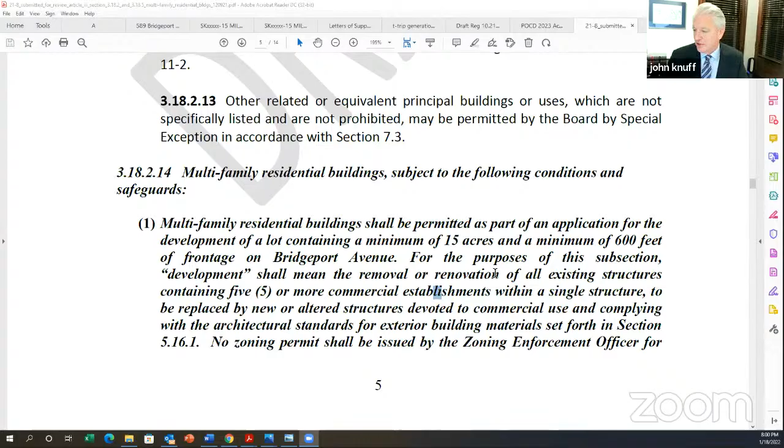Next sentence. And here's the connection. No zoning permit shall be issued by the zoning enforcement officer for multifamily residential buildings approved under this section unless or until a zoning permit for any portion of the commercial development has also been issued. So the idea here is that you can't simply come forward with a special permit application for the multifamily and maybe a special permit application for the commercial as well, and then build the multifamily and walk away from your commercial obligations. You have to do both.

Such multifamily buildings shall be limited to efficiency, 1-bedroom and 2-bedroom dwelling units. This is consistent with many of the other corridor design district regulations, including CDD1 and CDD2. The maximum number of dwelling units shall not exceed 17 units per acre. This is actually far less dense than the requirements in the CDD1, CDD2, as well as other zones. The maximum building area coverage shall be 25%. This is for the residential portion. In the CDD3 it is currently 50%, so less dense than what is otherwise permitted.

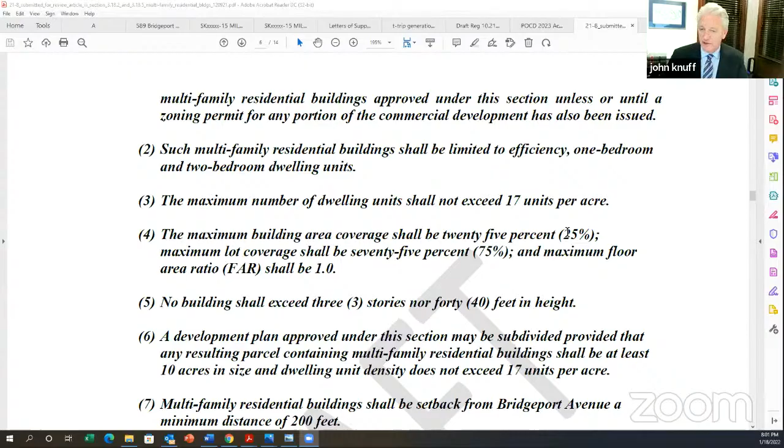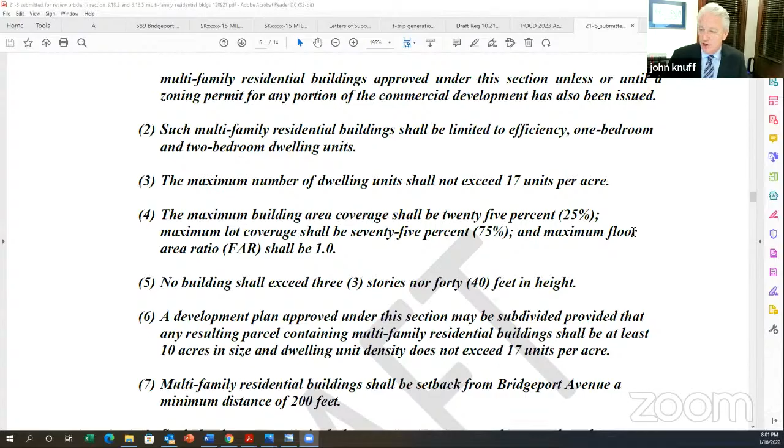Maximum lot coverage shall be 75%, and maximum floor area ratio shall be 1.0. Those are consistent with your existing regulations. No building shall exceed 3 stories nor 40 feet in height. That is consistent with the CDD3 zone, as well as other corridor design district regulations regarding multifamily developments.

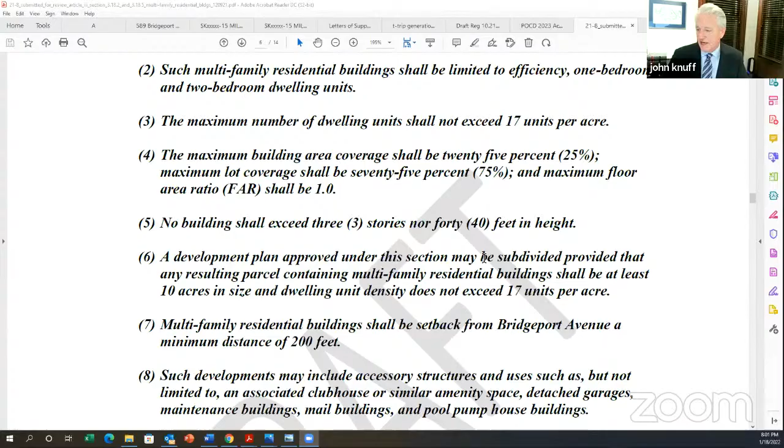A development plan approved under this section may be subdivided, provided that any resulting parcel containing multifamily residential buildings shall be at least 10 acres in size, and the dwelling unit density does not exceed 17 units per acre. So same thing, it just creates the opportunity for sale of the residential portion of a larger commercial development that has gone through the significant enhancement as required by this regulation.

Now, number 7, this one's important. Multifamily residential buildings shall be set back from Bridgeport Avenue a minimum of 200 feet. When we get to the concept site plan, you'll see how this actually plays out. But what it does, it addresses particularly the challenged sites, or in this case, the site that is rather deep along Bridgeport Avenue. I think if you scroll through Google Maps or the city's GIS system, you'll see that there are very few, if any, properties along Bridgeport Avenue, either in the CDD3 or the CDD2 zone, that have the depth that this site has. And that depth creates real issues with regard to creating commercial developments.

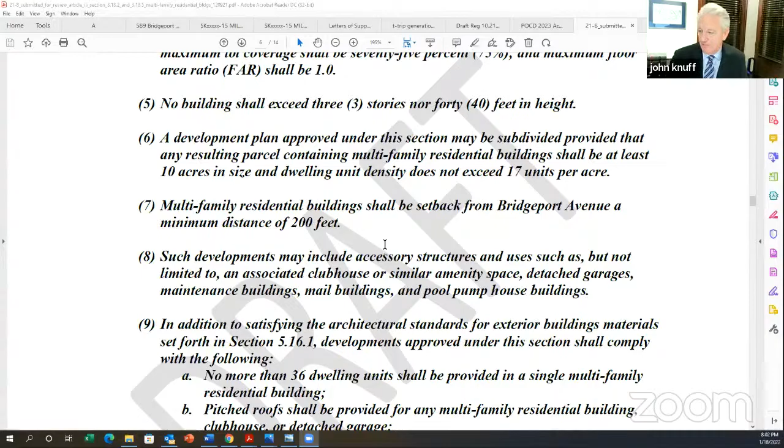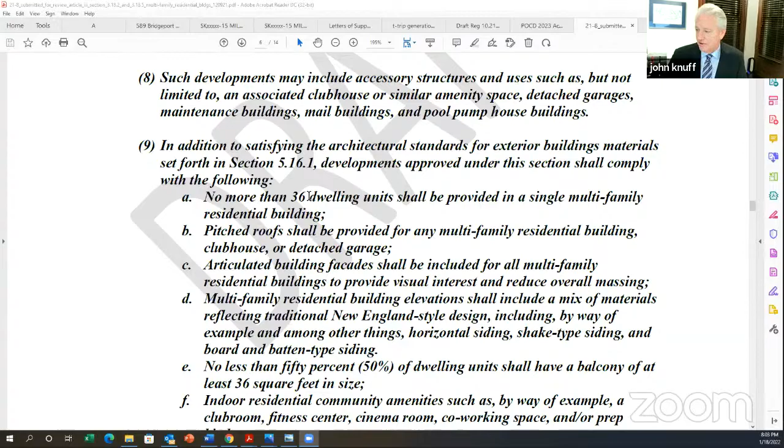Such developments may include accessory structures. Obviously, you want to create amenity space for the residents. And then with regard to the last, what we want to do in this section, number 9, is to create a really attractive development, residential developments of the proper scale that will appeal to a variety of residents. And when I say variety of residents, we're talking about singles, divorcees, empty nesters, young couples, snowbirds, the typical families in transition that would likely be inhabiting most multifamily developments.

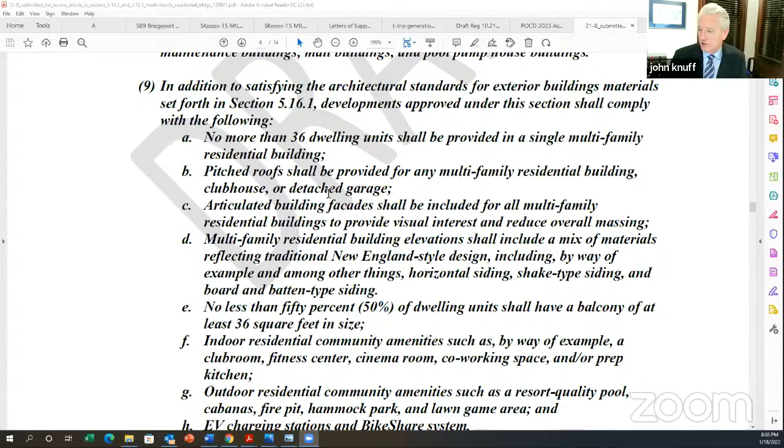So here's what's required. No more than 36 dwelling units should be provided in a single multifamily building. Pitched roofs shall be provided for any multifamily building, clubhouse, or garage. Articulated building facades. Multifamily residential buildings shall include a mix of materials, including New England style design, including by way of example, siding, shake type siding, and board and batten siding.

No less than 50% of dwellings shall have a balcony of at least 36 square feet in size. Indoor residential communities amenities, by way of example, shall include clubroom, fitness center, cinema, co-working space, prep kitchen, again, trying to be as attractive as possible to a wide range of clientele.

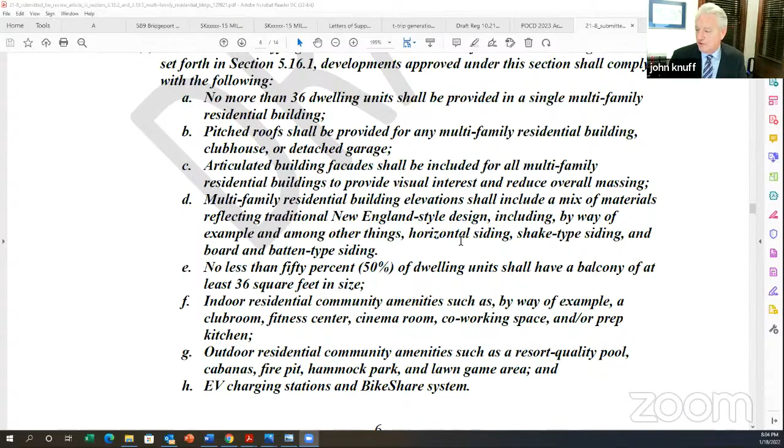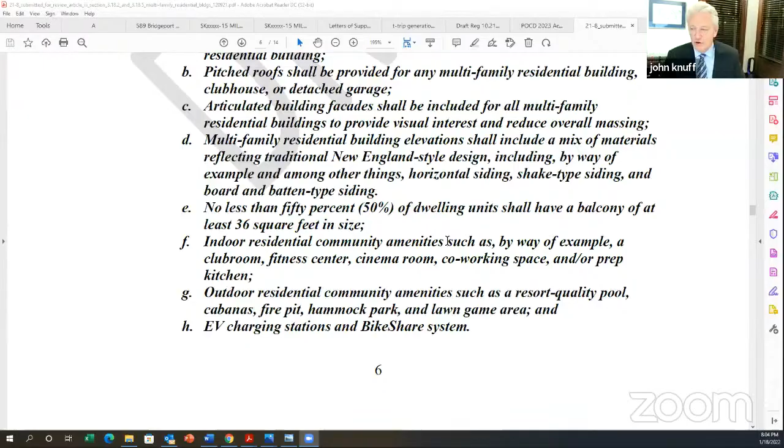Outdoor residential communities amenities such as resort quality pool, cabanas, fire pit, hammock park, and lawn game area, and then EV charging stations and BikeShare system. Again, the whole goal is to help create a pedestrian scaled walkable community that appeals to a variety of residents from all walks of life.

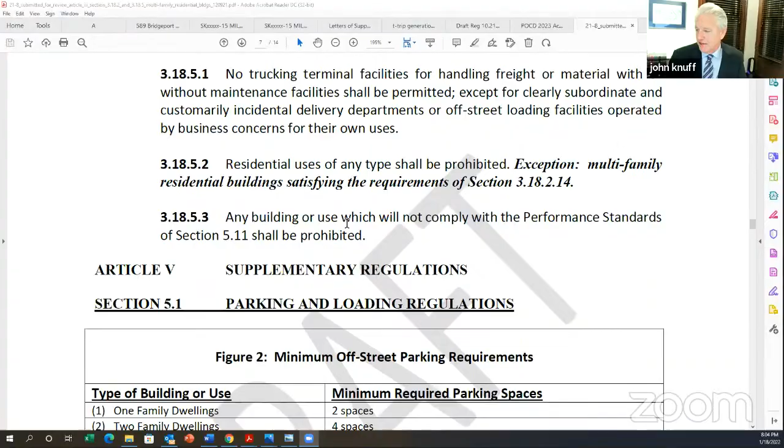In addition to that regulation amendment, we are also proposing to obviously add the CDD3 multifamily in the parking requirements and mimicking the parking requirements as found in the CDD1, CDD2, and the MCDD zone. So that's the proposed regulation amendment.

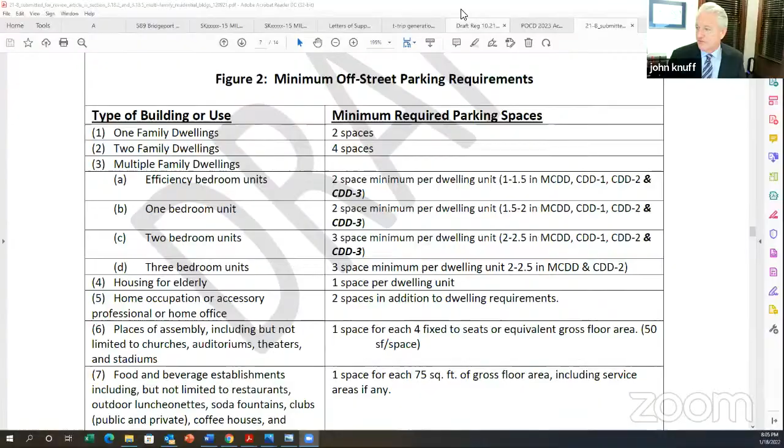I'm going to stop sharing the regulation amendment for a second and show you a concept plan that exhibits these various components. So, oops. All right, can we all see the, let me see. No. Okay, here we go. You stop. Yeah, okay, there we go.

Yep, here we go. All right, so here is a concept plan based upon the regulation amendment I just described. Just to orient everybody, Bridgeport Avenue is at the top of the sheet. We have Lansdale Avenue along the west. That is in this area here. This is Jonathan Law High School. You'll note that there are single-family residential properties surrounding the site.

You'll note that the Enterprise Rent-A-Car is not part of our property, but the other two commercial properties are Walgreens and Taco Bell. What this proposes to do is to completely redevelop this front corner. As you know, and we have some photographs of the existing conditions in a minute, this strip center up front is really front and center on this property, even though the property is rather quite large. This building right here sort of sets the stage for the rest of this rather large parcel. And so we paid particular attention to how that would be treated.

The existing Ocean State and Dollar Tree would remain in place. And then the balance of the property, as you see, is very comfortably outfitted with several multifamily residential buildings. And what you're seeing here, this yellow line, is a potential lot line. As I said, we could create a minimum of 10 acres on this parcel that could be sold, but this would still continue to operate generally as a whole. But this is a concept plan that reflects the regulation amendment that I just described.

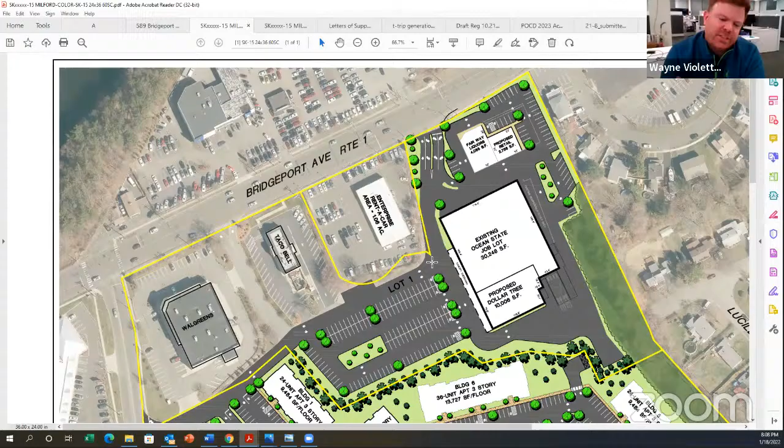As mentioned, and as we're going to be seeing, contemporary architecture certainly is a certain facet that will help enhance this Route 1 corridor. But with landscaping, potential signage, and lighting at the entryway, this is a key note, a key gateway into this particular site. It's highlighted there with some schematic landscaping shown. We think that's going to go a long way on welcoming visitors, residents, and the community into this particular frontage of the site.

And as we can see with the overall concept, it's quite different than what's there now. And there's a lot of good to that, and a lot of goals that we're accomplishing with this kind of initial take at the layout of this particular site. By having a multi-family community here, it's quite a bit different than the sea of pavement, the large expansive pavement that's out there in the retail site, or another potential use, which might be large commercial or industrial.

The residential community allows us to create more interesting spaces, a lot more green space. One of the goals that I wanted to highlight that we're making a point with this particular text amendment and push for multifamily is the potential reduction in impervious coverage, the likely increase in infiltration and reduction in runoff.

So, approximately we could reduce impervious coverage in this particular area, as an example, by approximately 20% in comparison to a retail or commercial space in the rear of the site. And not only is it a 20% reduction, but it's also a carving up of spaces, attractively landscaping, creating great amenity zones in between all these particular buildings and around the clubhouse. So it's not only just overall reduction, but this particular layout and something similar to this with a multifamily use can go a long way and really reinvigorate this particular site.

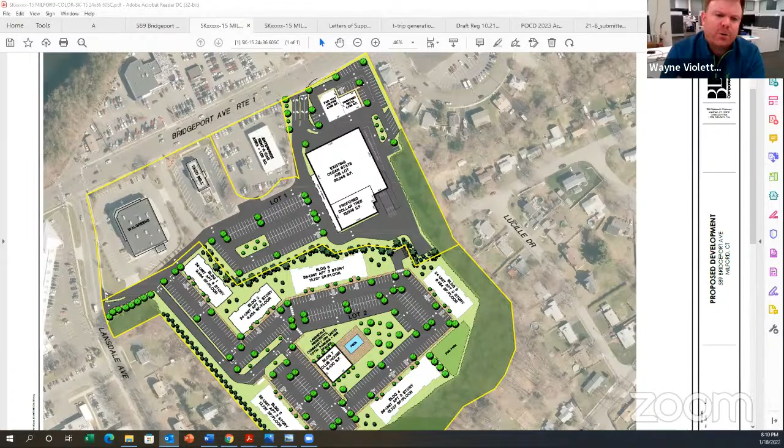Something else I wanted to mention as far as the goals Attorney Knuff had mentioned before is our respectability with our surrounding uses. So in this initial concept, we make a real strong point to maintain the limits of the current extent of clearing and development. What you see underneath this rendering would be the existing parking area. So we would like to maintain as much of the existing vegetation as possible, really have this multifamily fit in as it was always intended to be there. Of course, in areas where we need to supplement with buffering, we would certainly do so.

This is intended to be a well-landscaped, well-amenitized type of community, one that's going to certainly invigorate the site, but also be pedestrian-friendly, bicycle-friendly, and vehicular-oriented, with clear, defined paths as it needs to be. So a few of the goals as it relates to the site layout include pedestrian circulation, clear, defined routes for the cars and the vehicles on the site, and opportunities to connect multimodal with connecting to Route 1, bike amenities on the particular site.

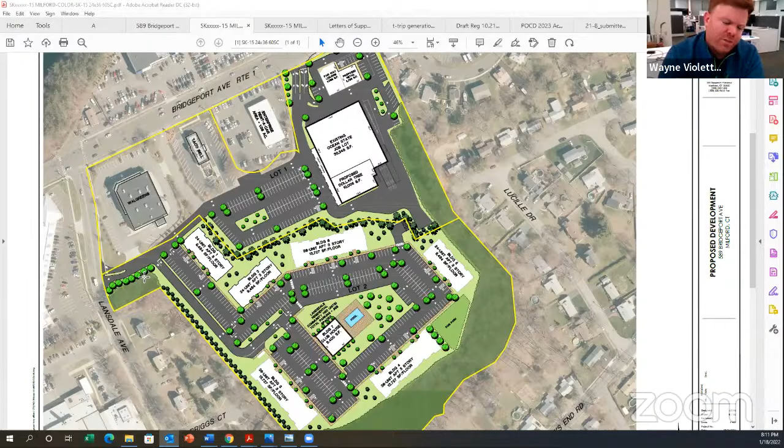So by potentially approving the text amendment, you could see that this is a very viable use to the site, comfortably staged, comfortably laid out, allowing for plenty of landscaping to occur on this particular site. We think it would be a great fit, a good opportunity for the site to reinvigorate and fit well within what Milford is doing along Route 1 and throughout the city. So I'll pass it back to John and or Tom to walk through some of the architecture.

Thanks, Wayne. One or two other things I want to point out that I omitted. This concept plan is showing 180 units on around 11 acres or so. So as I said, this is far less dense than would otherwise be permitted or required in the CDD1 or CDD2 zone. You would only need approximately 6 or 7 acres to have the same density in the CDD1 or CDD2, and this is obviously 11 acres for this number of units. You note here we're maintaining this existing curb cut on Lansdale Avenue.

We have submitted a traffic letter from BL Companies indicating that even though Bridgeport Avenue has about half the capacity that it can handle in terms of the number of cars traveling, this type of use, the combined remaining commercial plus the proposed residential, is far less traffic than if you were to simply re-tenant the existing buildings. So I'm going to stop sharing and then start sharing the architectural, and I'm going to have Tom Scott describe that for you. So give me 1 second.

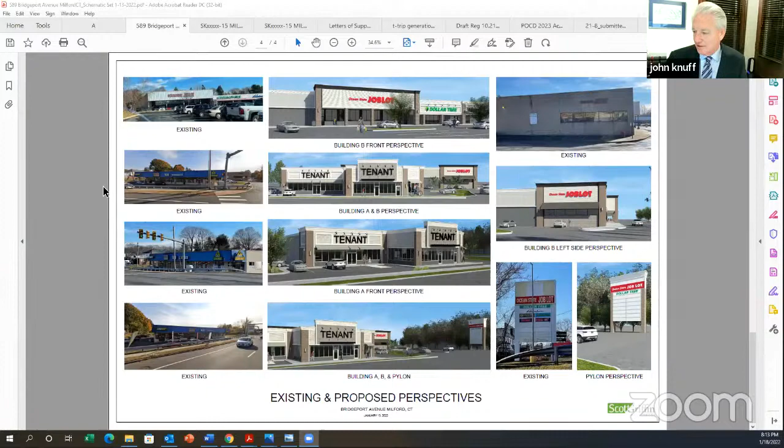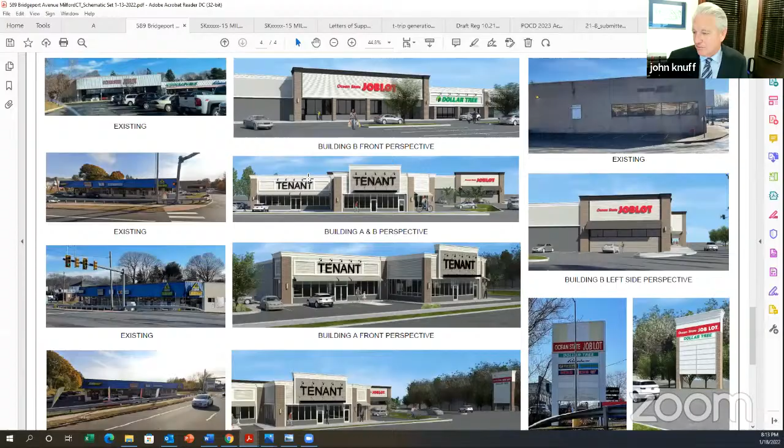Okay, so I want to introduce Tom Scott. He's an architect with SGA architecture firm. And Tom, let me know which of your slides you'd like to see. But I thought this one was particularly appropriate to start with because it shows the existing site in all its glory, as well as the dramatically improved condition that Tom has designed. Tom. Thank you, Attorney Knuff. My name's Tom Scott. I'm the architect with Griffin Architects. And I think that the image you have on the screen is the right one to start with.

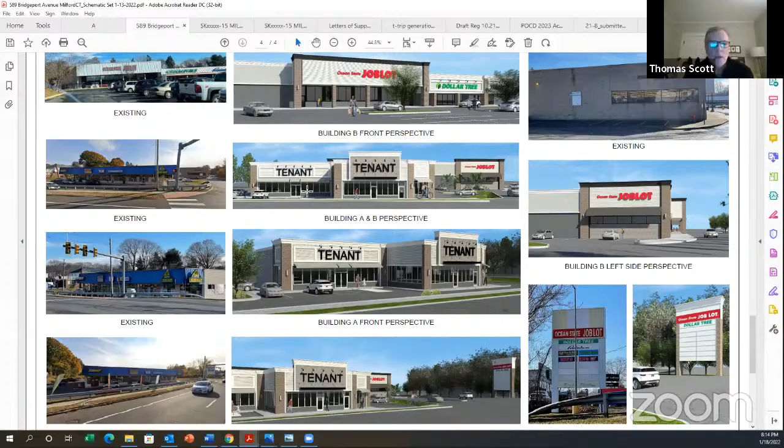I think what we tried to do here was show comparisons between what's there today and what could be there with a little bit of vision and thought process about the buildings, the scale of the buildings, how to make them more approachable for pedestrians, to make them more present for tenants who want to be there, because that's the key. We want to be able to make sure that we can maintain and attract tenants that find this an attractive facility that is easily accessible and visually pleasing and visually identifiable from the main road, Bridgeport Ave.

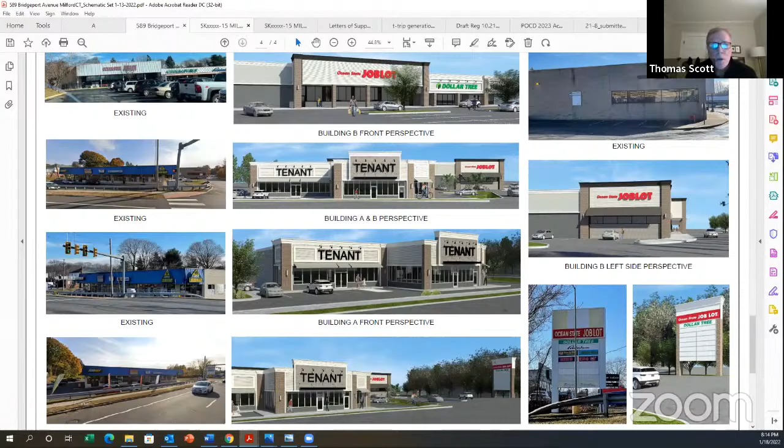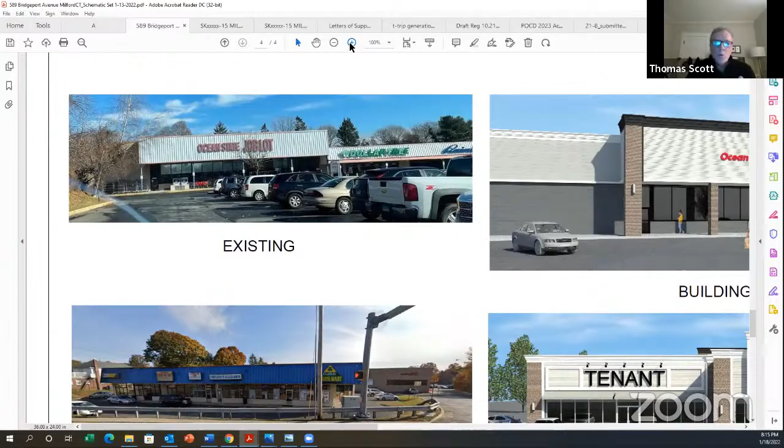So I'll start at the top. I guess the top image is of the Ocean State Job Lot from the parking field, kind of within the existing parking field. The existing photo is on the left. We cut off the photo to the right because everything to the right is going to be demolished. We're saving the Dollar Tree and the Ocean State Job Lot. Slide over to the right. And what we're trying to do here is introduce some more pedestrian scale materials. Brick, we really encourage and want to use the brick as a scaled element.

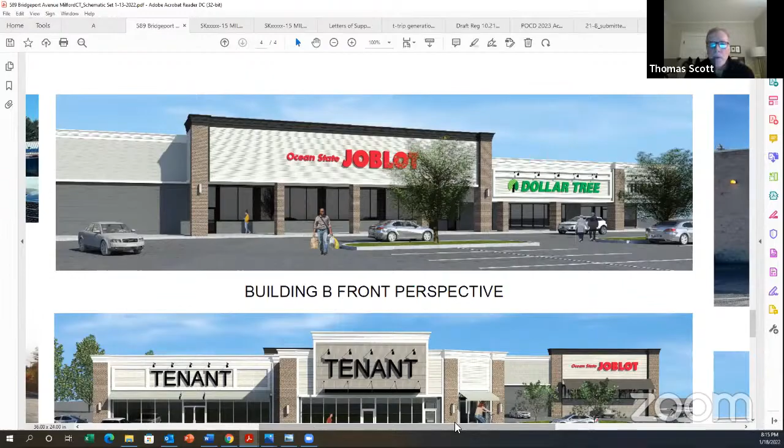We see a lot of that in other developments in town. So we want to introduce that as an important element. The other thing that we feel strongly about is using other materials that are progressive and modern. So we're using porcelain tile materials that have texture and color in them as well. And then through the use of other elements such as sconce lighting on the building facade, on the pilasters, decorative lighting to illuminate signage. Those are the types of things that we want to do to help improve the look of the existing building.

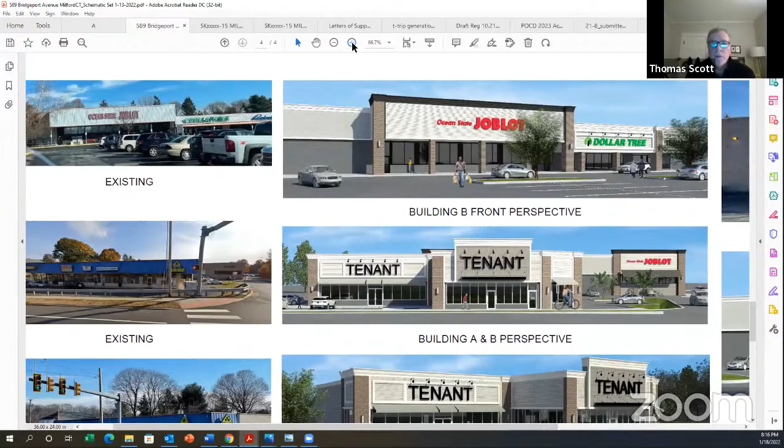The next photo down, the existing image from Bridgeport Ave, you can see the metal, I guess you would call it a mansard roof element. That is a very dated element that was used widely back in the 70s and 80s. That has gone away many, many years ago. And you can see that the building itself has a very low appearance. There's nothing drawing you in. There's no vibrance. There's no pedestrian scale to it.

So the image to the right of it, our building A and B perspective, gives you the sense of what we're going to do. Our proposal is to improve the presence on the roadway, to increase the height along this edge of the building as well, maybe in a stepped or multi-stepped manner to give each tenant their own identity. So we're hopeful that we can attract larger tenants that will want to be here, and then the pedestrian and the public will want to visit and come to the site often.

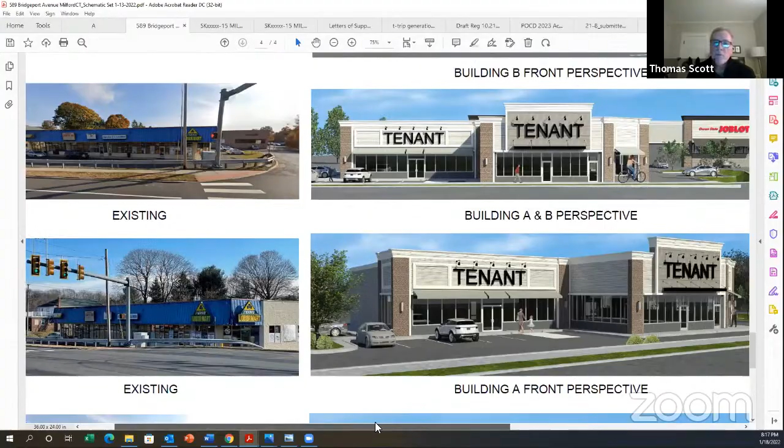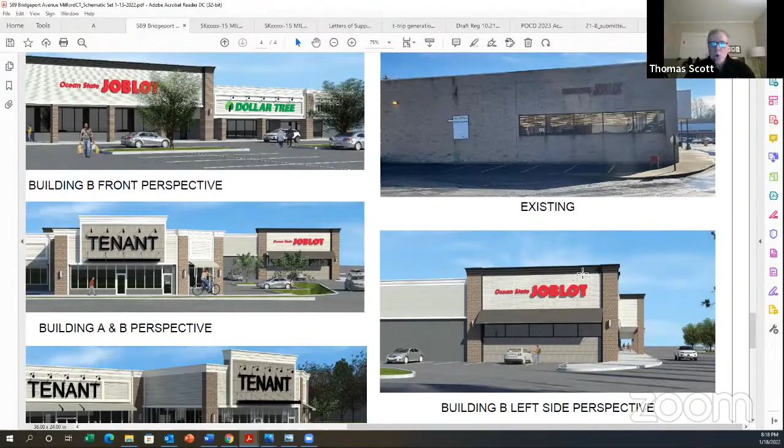You can see in the background the Job Lot. There's one edge of the Job Lot building that faces Bridgeport Ave as well, and we decided to treat that with the same materials that are on the face of the Job Lot that faces the parking field. They lack the ability to really have a presence on Bridgeport Ave. But this facade right here steps out from behind the small building in front. And just that little piece, you can see it in the image to the left, and the image to the right is an enlargement of it. By just exploding that piece of the building a little bit, putting some fabric awnings on it, putting some modern materials in brick and human scaled elements to it, all of a sudden it feels like something that really wants to draw you into the site.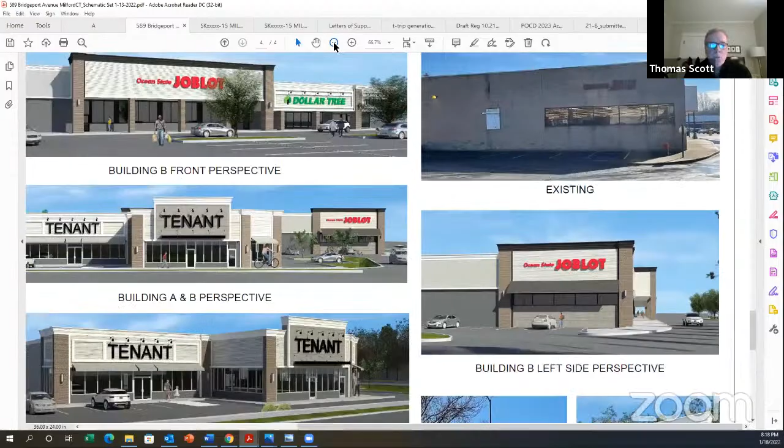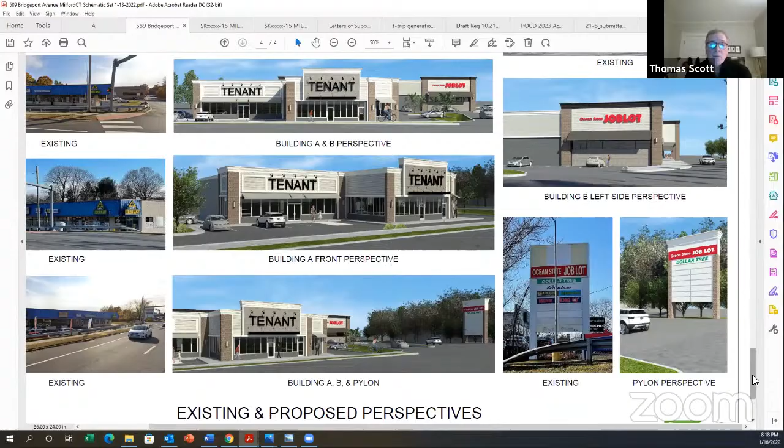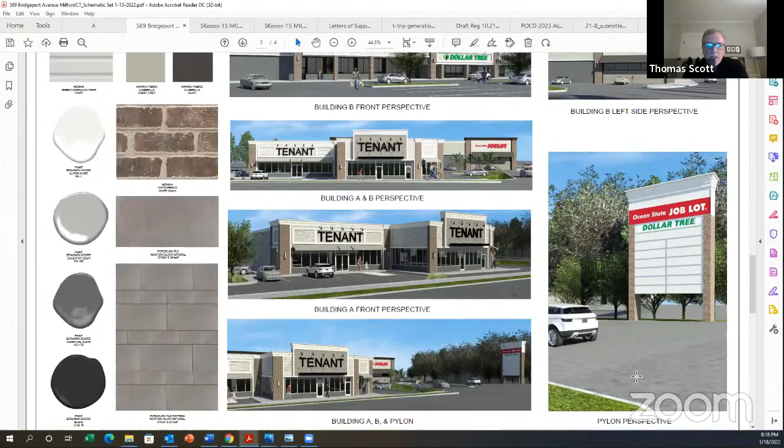So we're excited about bringing improvements to the site, making this a viable and approachable facility that will support the balance of the rest of the project, the residential project, and be something that is really the beginning of the new town improving. The last image is the one at the very bottom that steps back and gives you a perspective of the overall approach, the drive-in. The pylon sign will get upgraded with similar materials to the buildings. We have a nice view looking right into the site. You can see the Job Lot sign in the distance, so it's very visible. People driving by will clearly see that the Job Lot is a viable tenant there. And then the tenants, of course, on Bridgeport Ave.

Again, the image on the left, you see all the materials that we've selected. We're using brick and modern finishes like porcelain tile, but scaled porcelain tile, not a blank slate of porcelain tile, but porcelain tile that has a pattern and has some imagery. And of course, the color palette is huge as well. So I think this really brings us into this century and into a new way of thinking about architecture going forward, especially for the commercial property. So thank you for your time.

Back to Attorney Knuff. Thank you. Thanks a lot, Tom.

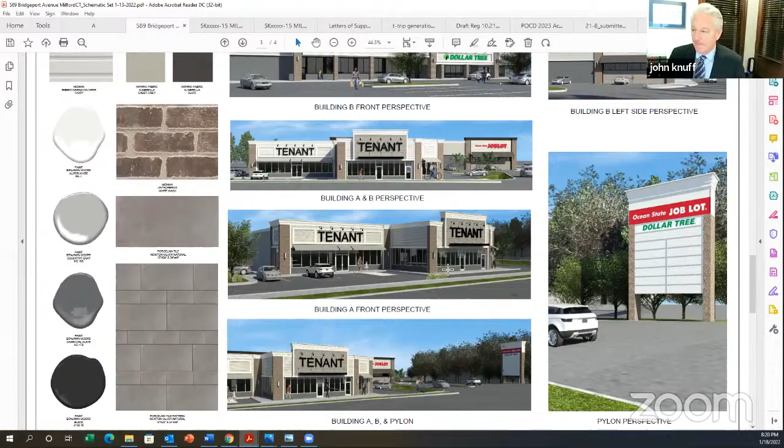One interesting thing is in the regulation amendment, we referenced 5.16.1 and the architectural requirements. And you might say, well, you're required to comply with those anyway. But 5.16.1 actually has a waiver provision. And so what we've done in our regulation is to eliminate the ability to request a waiver of those requirements. We are making it obligatory that we comply with those architectural requirements. And that's what I think Tom has done in a really magnificent fashion here.

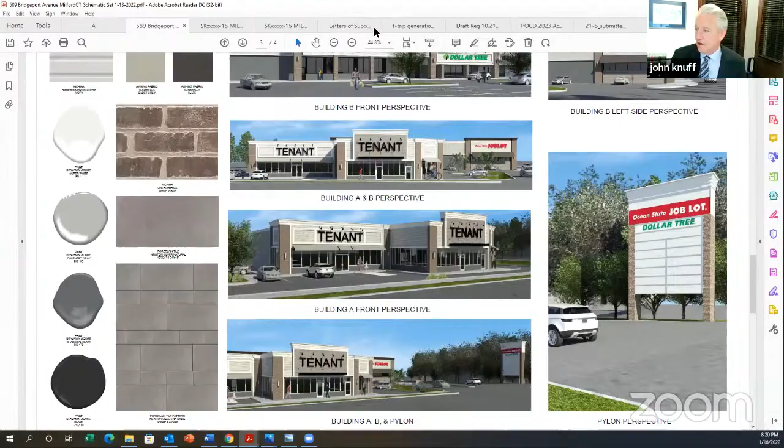As we indicated, we have a narrow frontage on Bridgeport Avenue once you take away the two existing retail buildings of Walgreens and Taco Bell. So this is a really wonderful opportunity in a rather narrow frontage to really set a whole new stage for this property. And the last thing I want to do is show you some potential, just to give you a feel of what a residential community may look like that complies with the regulations.

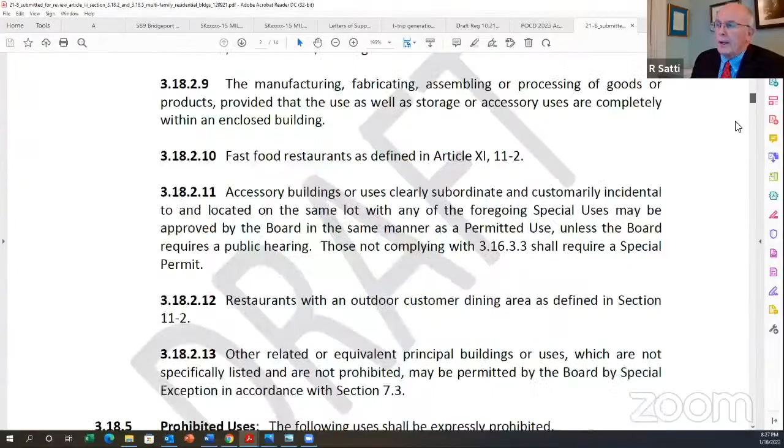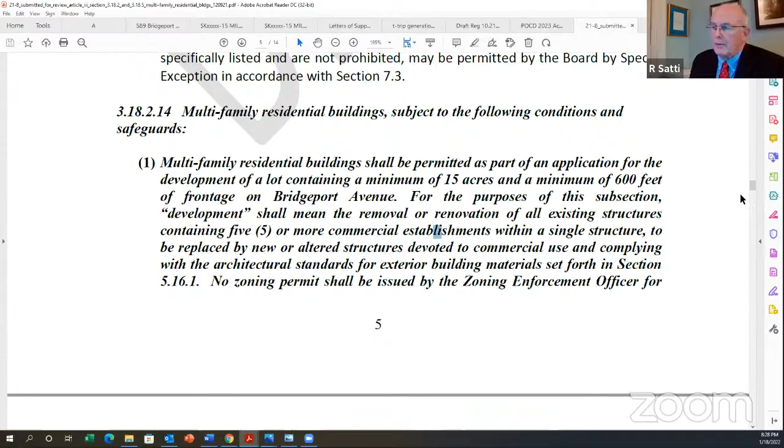Okay, and then on number one, you did change it and you said development shall mean the removal or renovation of all existing structures. We see the pictures, which are fantastic, but approximately how many structures do you expect you could be removing for the purpose of putting up the multifamily units? Sure. Let me share that screen.

But the important thing to understand is that you can never comply with the requirement that we maintain the commercial buildings along Bridgeport Avenue and fill the entire site with multifamily. As a practical matter, we have the requirement that the minimum distance from any residential building to Bridgeport Avenue has to be 200 feet. So while in theory that would be possible, we couldn't do that because of the 200 feet. So the most units that we would request is 180, as before you. And again, that would require a site plan application, which we would take up at a different time.

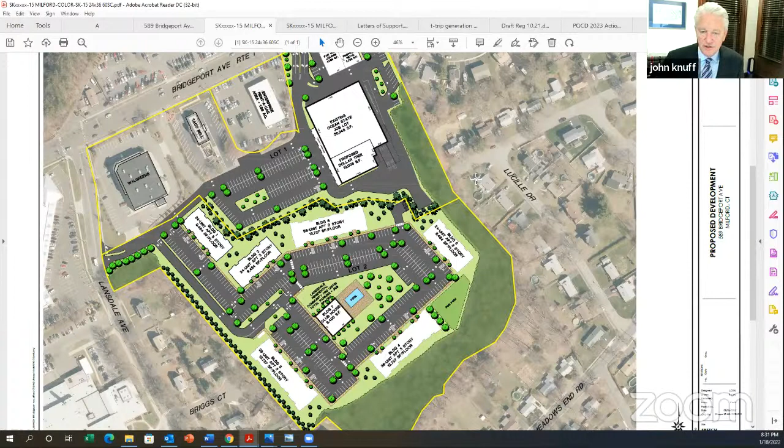If we wish to, would you agree that we could put in a requirement of a percentage of it being affordable housing? It's to you, Mr. Knuff. We would greatly prefer not to include any affordable units. The idea is to fully amenitize this site and provide the absolute utmost in terms of fit and finish. Once you start adding affordable units, it cuts into the ability to do that. So we would greatly prefer not including any affordable units, consistent with the way the regulations are for the CDD3 zone.

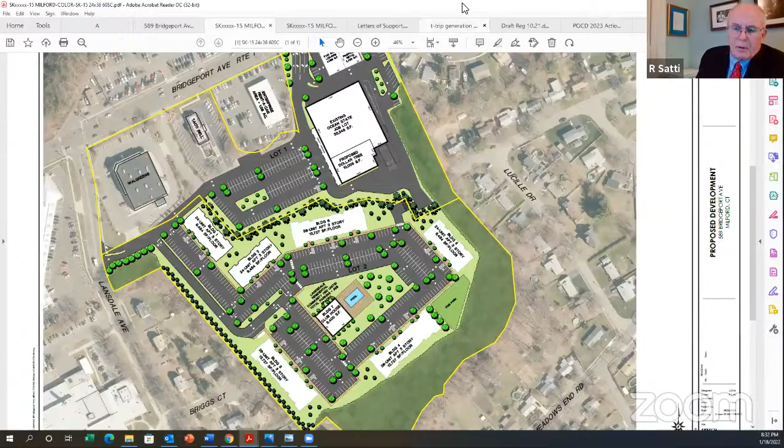Lastly, if we were to consider a requirement in this regulation change that a certain percentage of rooftop space be used for solar heating or otherwise. I see you putting in EV charging stations, bike share systems. What's the position that you and your client would have about that? I would need to get back to you on the proposal for solar panels. The simple requirement of including solar panels is sometimes difficult because occasionally you need to put that electricity back onto the grid. So it's not always as simple as just slapping on solar panels. But I'd want to get back to you about that suggestion. Thank you very much for an excellent presentation.

Thank you. Mr. Satti, Joseph, you're muted.

Through you to Attorney Knuff, is there only one entrance and exit to the residential area? Well, the current plan actually shows two, so you can come in off of Bridgeport Avenue and sort of sneak your way around, but as a practical matter, most folks will come down Lansdale and enter here. Okay. Lansdale is the main entrance and exit. Yeah, and there is an existing curb cut there leading back to the commercial development. As I indicated, the traffic report we submitted shows there will be less traffic on Bridgeport Avenue and in the area than if we were to re-tenant the existing buildings. Thank you.

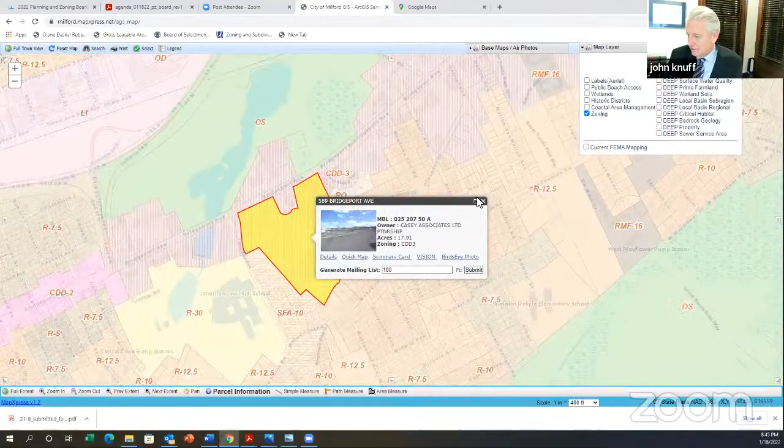So, I mean, the vast majority, and that's sort of the point, the vast majority of the properties along Bridgeport Avenue, both in Devon and in the CDD3, are very, very small parcels, which has really been a huge hurdle for the redevelopment of those parcels. This one is obviously significantly larger, and it faces other challenges in terms of finding users that can use this much space, but obviously it's also very deep.

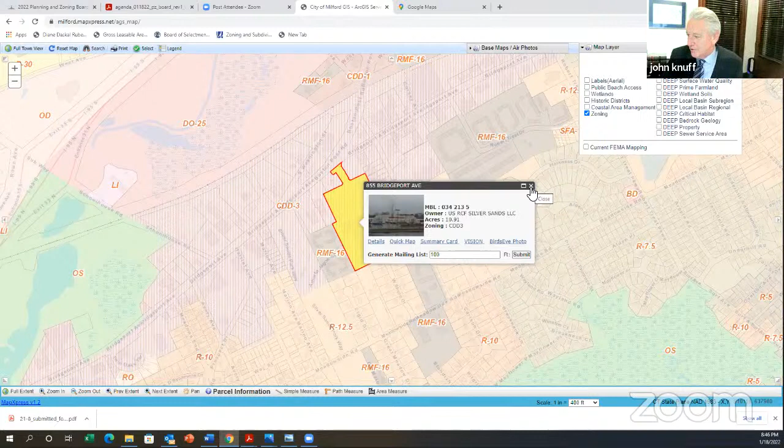So I think if you want to change it to 11 acres, I'm pretty certain that we would still be the only one. Let me see what this one is. Oh, there's one other. Well, you could merge them. 10.91. So, no, actually 11 would work. Right, this is 10.9. You could combine some lots to get there. Without question. You can always acquire a collection of parcels, but I doubt that you could acquire them that would have the required depth of keeping the multifamily residential 200 feet from Bridgeport Avenue.

Right, and I'm not saying that it's not a good idea. I'm just saying that there's potential for residential use on a commercial corridor. I know. I think that is going to be part of the future of suburban redevelopment, but really the beauty of this is we're maintaining the integrity of the commercial corridor and putting the multifamily in the rear directly adjacent to the other residential uses and directly across the street from Jonathan Law.

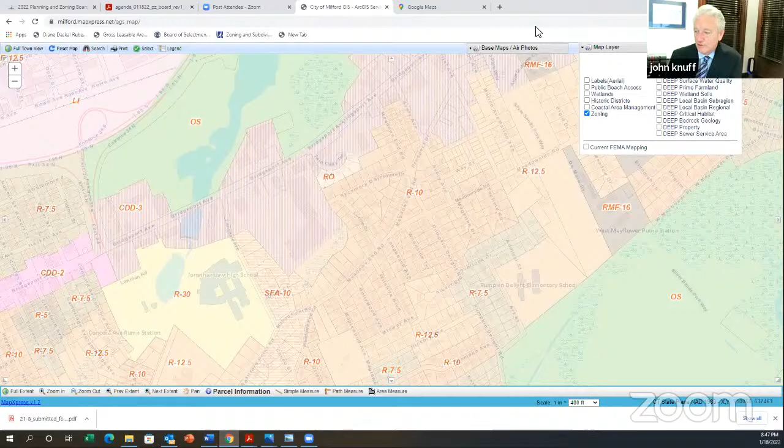I mean, candidly, there was a lot of interest in the site for warehouse distribution and those sorts of uses, which frankly would have been wildly inappropriate next to a high school. I don't know that you want to have multiple tractor trailers and vans making last mile deliveries out of this location. Understood.

Okay, again, we'll ask again with any new information from the applicant. Is there anybody from the public who would like to speak? And scanning the screens, Mr. Chair, I see no one waving their hand. I see no one raising an electronic hand either. Going once, anyone would like to speak? Going twice? Last time, would anyone like to speak? Mr. Chair, I see no one raising their hand. Okay, seeing none, we will close the public hearing.

Mr. Chair, just a point of information. If we close the public hearing, do we not have to have a vote within a much shorter period of time if we ask for an extension? If we don't vote on it tonight, do we have to keep it open until next week or next two weeks? We don't need to keep the public hearing open. You have 65 days to vote once you close. So you still have quite a bit of time. We could still discuss it, and we would be able to get more information, but the public would not.

Well, no, let's be clear, Mr. Chairman. If you want something more from us, we couldn't offer that either. I mean, you certainly have the ability to close the public comment portion, but not the public hearing itself, if you want to hear more from us. Okay, so thank you for correcting me on that, Attorney Knuff. Well, I think we can close the public comment. Is there anyone who feels we should leave the public hearing open? I do, Mr. Quish, and I have some other questions for Mr. Sulkis to help guide us on what we're going to do tonight, if I might.

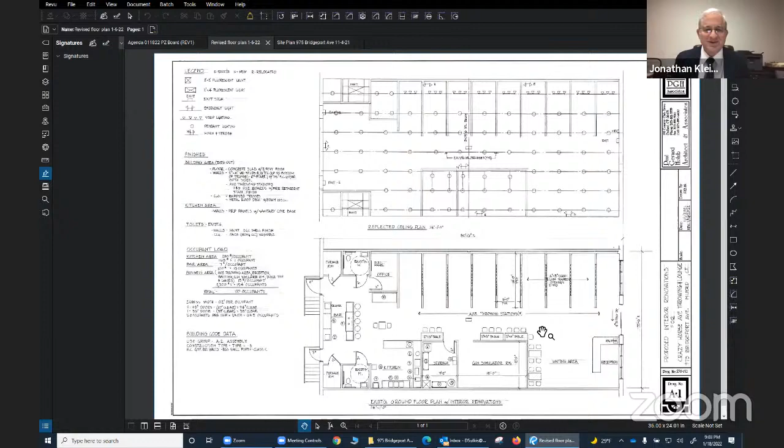Now you might ask, what is axe throwing? I never knew what axe throwing was till I took a look at this. Axe throwing, I can analogize it to darts, except you're using a hatchet, which is bigger than a dart. And it's not the kind of axe or hatchet that you would use to chop wood. It's not as sharp. These things are designed specifically for this activity.

It's an activity that's become more popular in recent years around the country. This is not the first one in Connecticut. It's an entertainment type of a thing. It's a sport type of a thing. It's done on a competitive basis as well in some places. And like I said, it's like darts. It's throwing axes from a distance of, I think it's about 12 feet usually, at various types of targets. There are 9 lanes proposed here for axe throwing.

And the other feature of this is there's a room with a gun simulator. Mr. Sulkis, if you could please put up the revised proposed interior renovations so we could see that. Thank you. There's no firearms involved here in the gun simulator room. It's basically a simulator. It's very similar to a training device that law enforcement uses.

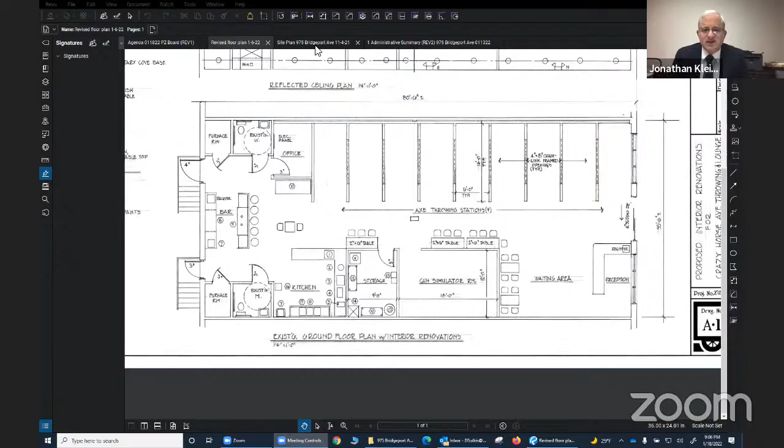And one of the things that was mentioned by Mr. Sulkis in his staff review is the parking situation there. There are 41 parking spaces for the 6 tenant uses in this development. But that should be plenty sufficient for what's planned here. Right now, you have the other tenants there. You have the Kim Yami Sushi, which is a small takeout place, and in the statement of use, their hours are listed. There are no overlapping hours between the sushi takeout place and the axe throwing use.

There's the Dragon 168 Chinese takeout place, which does have some overlapping hours, although I want to emphasize the axe throwing lounge is proposed to be closed on Mondays and Tuesdays. So it's a 5-day-a-week operation, but not Mondays and Tuesdays. So on those days, there's no overlapping parking issues with any of the other uses in this development. One of the spaces in the existing strip mall is currently vacant.

Then you have the Viola Wine and Liquor store, which also has some overlapping hours on Wednesdays and Thursdays for a 4-hour period, Fridays from 4 to 9 p.m., Saturdays it would overlap from 11 in the morning to 9 p.m., Sundays from 12 to 6.

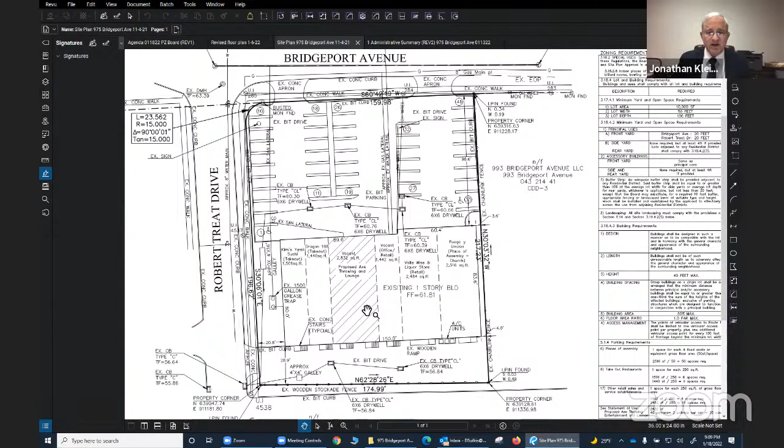So people coming to get, well, first of all, the sushi space has no overlapping business hours, so we don't even really need to consider that. The Chinese takeout, people come in, come out. No one is typically there for a very long period of time. The wine and liquor store, you come in, you make your purchase, you go out. Depends how long anybody would be there. Depends how you shop. If you shop like me, you're in and out of there in 3 minutes. You shop like my wife, maybe you're there for 15 minutes.

And then, again, the church has presumably Sunday worship hours in the morning. I don't know if they have Bible study sessions at other times, but it's a lightly used thing. So you have in and out use here. There's going to be very little overlapping with the proposed use of the axe throwing lounge. And I honestly don't see the 41 parking spaces that are available for this strip mall as being anything less than adequate here for everybody's space.

The input that Mr. Sulkis received from the various other departments, everyone else is on board, has nothing negative or no objections to state for this use. Nothing's going to change about the footprint of the building or anything like this. It's just the interior renovations which will be done. And if you have any questions for me or for Mr. Alterio, I'd be happy to answer them.

Well, I have a couple. Excuse me. David, would you just explain to us why this is in front of us and not just a permitted use? Because it's indoor recreation, and as indoor recreation, it's a special permit. Simple as that. Okay. So that's anywhere in this zone, correct? If you're recreating inside, it's a special permit. Like the tennis center? I'm not sure it's in that zone. I think that's a different zone, but in this particular zone, an indoor recreational facility, which is what we classified this as, is a special permit. That's right. Okay. Any questions or comments from the board?

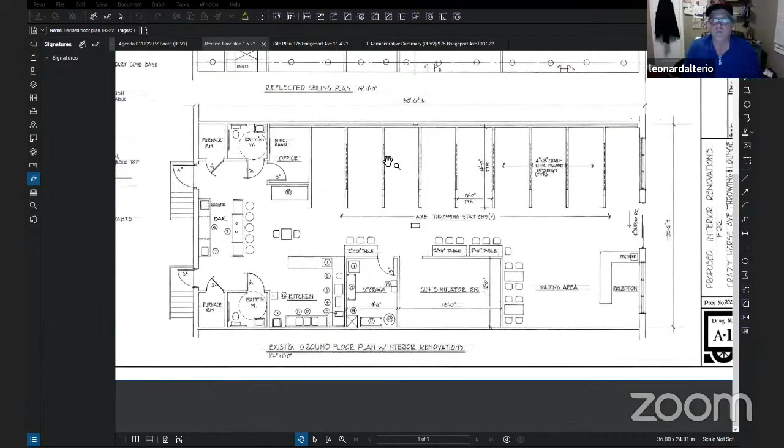Yes. And those dotted lines are where all the fencing is. But it's all V-groove pine. The back of it's got plywood, and it's got a rubber mat throughout the whole thing, all the way up to the top. So again, there's not going to be any recoil on it. All right. All right. Any other questions or comments from the board?

Seeing none, this is a public hearing. I would ask that anyone who would like to speak to the issue state their name and address for the board, and keep their comments to around 3 minutes. You can wave on the screen, or you can indicate electronically that you'd like to speak. Okay, so I'm looking at our screen now, and I see no hands, no waves, nothing electronic. Going once, going twice. No one would like to speak.

Okay, unless anyone sees any reason to keep the public comment open, we will close it. Is there anyone who feels there's any reason not to address this and vote on it tonight?

Okay, seeing none, I would hear a motion. I'll do a motion. Okay, Mr. Cater. This is pertaining to 975 Bridgeport Ave, Zone CDD 3. I move to approve as presented the petition of Jonathan Klein Esquire for a special permit with site plan review for an indoor recreational facility, axe throwing, on map 43, block 214, parcel 42, of which AMJ Properties, Inc. is the owner. I'll second that.

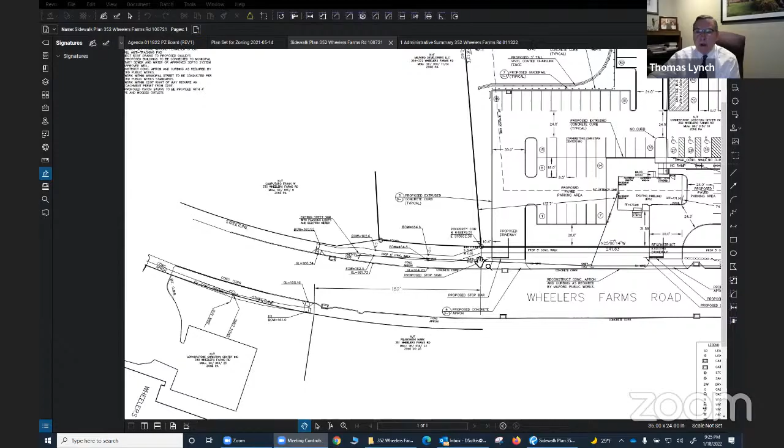I spoke to David earlier today. There was some discussion with the traffic division of the police department. Both Ron and I put in a call to Sergeant Craniac of the traffic division. It may very well be a condition, or part of their recommendations may be to have a crosswalk across Wheelers Farms Road where the two sidewalks end. If that's the case, we obviously have no objection to that. But what I wanted to stress is that there's going to be shuttle service from the parking lot at 349 Wheelers Farms over to the new parking lot when needed.

Again, during church services and during large events, there will be a constant shuttle service bringing people back and forth. So there really is no intention on the church's part that people will be walking up the street and then crossing Wheelers Farms Road during the busy traffic times.

I think the agenda had all of the city department reviews. I did want to note that we did appear before the Zoning Board of Appeals back in November of 2019, because the parking lot actually exceeds the RA zone maximum allowed lot coverage. We did receive a variance from the Zoning Board of Appeals to allow the parking lot.

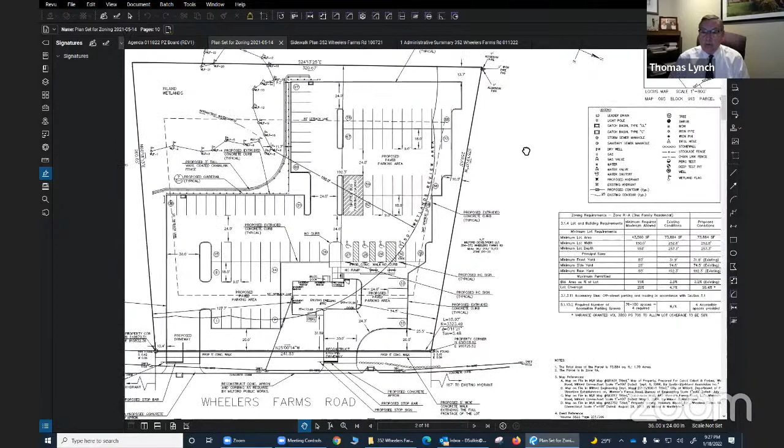It now has a lot coverage of some 55% of the site, and 25% is permitted in the zone. But we did receive approval from the Zoning Board of Appeals, so that's been taken care of. And as I said, the city engineer has reviewed the plans.

There's a comment that he had made about making sure that there's adequate snow shelf availability on the site. I think Ron will address that. He's confident that the particular area he's set forth on the plans as the snow shelf will be adequate to service removal of the snow during large storms.

So with that, I'm going to turn things over to Ron. He can go through the elements of the site plan. It's a pretty straightforward application, and happy to answer any questions that the board may have when we're done. Thanks. Thank you.

Good evening. For the record, Ronald Wassmer, professional engineer, land surveyor with an office at 158 Research Drive, Milford, Connecticut. Here representing Cornerstone Church. I'm going to briefly walk you through the site plan. David, if I could ask you to share the site plans with us, that would be great.

So this is the site plan on the screen now. You can see that it fronts on Wheelers Farms Road. The property to the north is the office complex, and I believe they just built some apartments to the rear of that. To the south is also owned by Milford developers, but that happens to be where the high voltage power lines are. And then in the southwest corner of our property is a portion of wetlands.

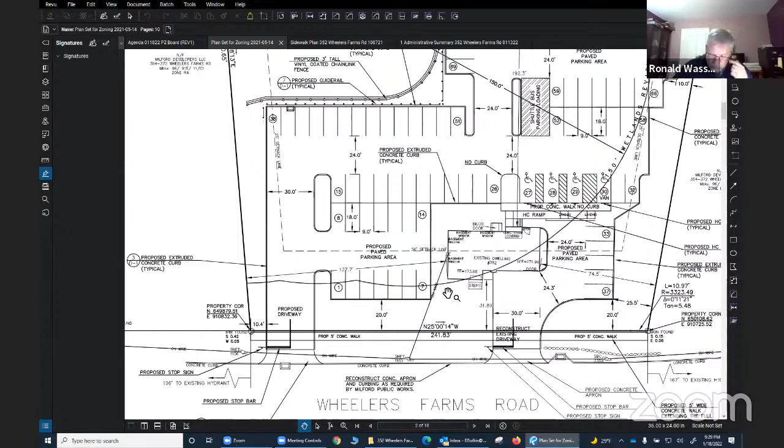You'll see towards the front center is the existing house that's going to remain as is. There's a current driveway that serves that house. We're going to expand that slightly to allow for some parking adjacent to the house. And then we're proposing a new driveway at the southern edge of the property to access Wheelers Farms Road.

There's a sheet that we'll discuss shortly on the sidewalks. This plan shows a sidewalk extending along the frontage of the property as required by Milford Public Works Department. You'll see the shuttle loading area designated towards the middle center of the parking lot. We'll go to the next page. I'll just touch base on this briefly.

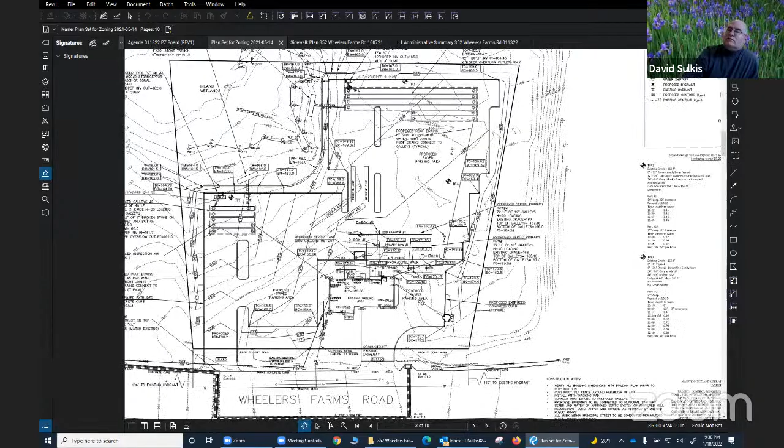This is the grading and drainage plan. So we have a significant amount of underground drainage facilities proposed to handle runoff from the parking lot. This plan was presented to the Milford Inland Wetland Agency, and it has received approval by them. The next page is a landscaping plan.

So there's quite a few significant trees on the site, but the majority of them will be removed to construct the parking lot. In the southwest corner, the wetlands will remain, and there'll be no trees removed from the wetlands. And then we're enhancing the parking area with a significant amount of street trees, evergreen screening, and the landscaping meets your landscaping requirements for off-street parking lots.

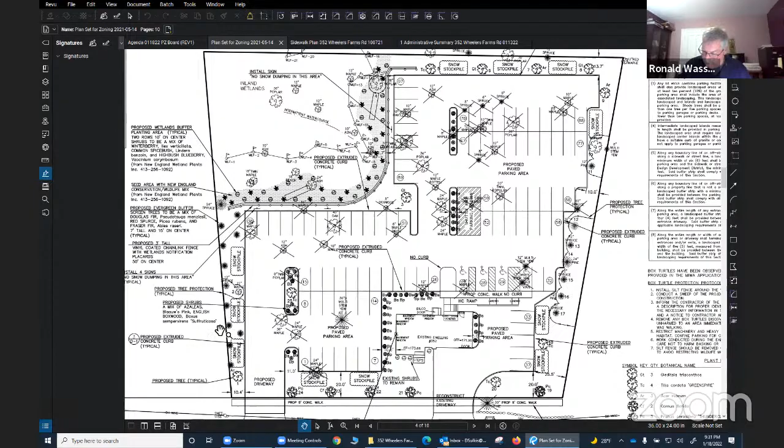We also have an erosion control plan. That's part of your site plan requirements. I don't know that there's too much to talk about there. We have an illumination plan that indicates the location of pole lights. The pole lights meet the illumination regulations of the city of Milford.

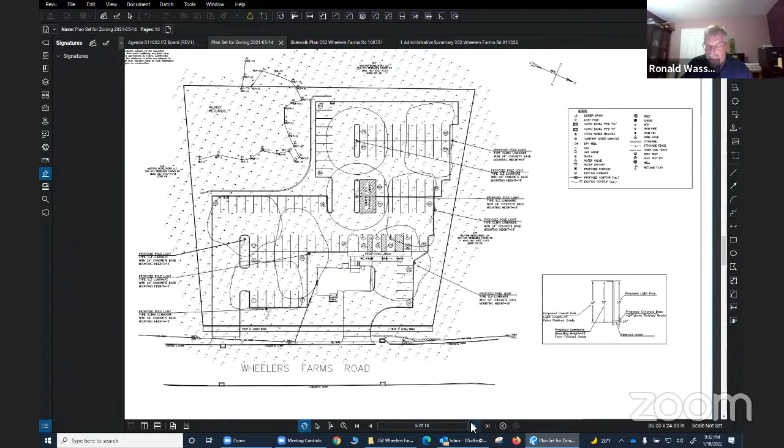Then we have a couple standard detail sheets that I don't know that there's much to talk about. And then the last page is the sidewalk plan. I just want to spend a second discussing that.

So currently, the church has a sanctuary at 349 Wheelers Farm Road. You'll see that in the lower left corner of this plan. And there is a sidewalk along Wheelers Farm Road that was constructed when that was built originally for the Shriners, but the church took over this property around 2010. So now we're proposing a parking lot on the

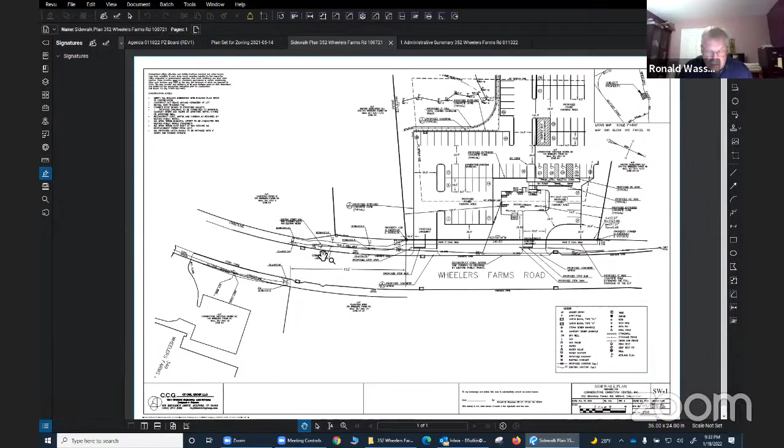western side of Wheelers Farm Road, and the requirement of Milford Public Works is that we construct sidewalk along the frontage of the property. So we took this to the next step. We have sidewalks existing on one side of the road, proposed on the other side of the road. I've indicated on this plan that we're going to extend the sidewalks from the limits of our property across to the south, across the land of Milford developers.

The sidewalk will be within the city's right of way, but this is where the high tension lines are. And then it extends about another 20, 30 feet further to the south. So the terminus of the sidewalk on the west side of the road ends at the terminus of the sidewalk on the east side of the road. So no jaywalking across the road per se. This plan does not indicate a painted crosswalk. That could be what the police department was looking for, and we're certainly happy to provide a painted crosswalk at this location.

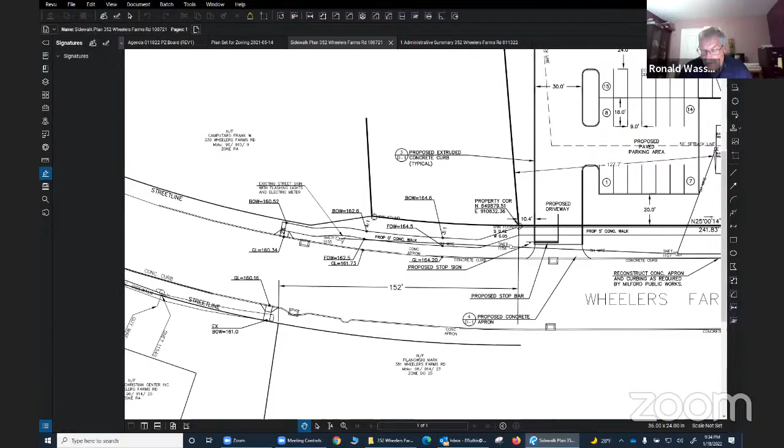Other than what I just mentioned, I think it's a pretty straightforward project. It's more or less a parking lot for the church. It'll be used intermittently, mostly on Sundays. Again, just to reiterate, there's a shuttle that will run between the two properties. I presume the majority of the people will use the shuttle, but if someone does choose to walk, we're providing a sidewalk to safely get from one parcel to the other. I'd be happy to answer any questions that the commission or staff may have. Thank you very much. Thank you.

Mr. Chairman, there's just one other point, to emphasize the zoning compliance of the plan. Section 519 of our regulations allows a parking lot to be utilized in conjunction with another parcel, such as what we're proposing here, as long as the parking lot is within 250 feet of the other property. This has been measured out to be 152 feet. So I just wanted to make it known for the record that the utilization of the parking lot at 352 Wheelers Farms is zoning compliant with that section because of its proximity. Thanks. Thank you.

David, is there anything you'd like to preface the discussion with? The applicant is proposing a change of use from an existing single-family dwelling located at 352 Wheelers Farms Road to a church rectory and a single-family dwelling as an accessory to the church, which will also provide parking for the existing church located at 349 Wheelers Farms Road. The parking as an accessory use is allowed through special permit under zoning regulation 313.13. The proposed parking lot is for 97 spaces. Section 5.1.9 requires the offsite parking to be within 250 feet of the main use. The plan shows a distance of 152.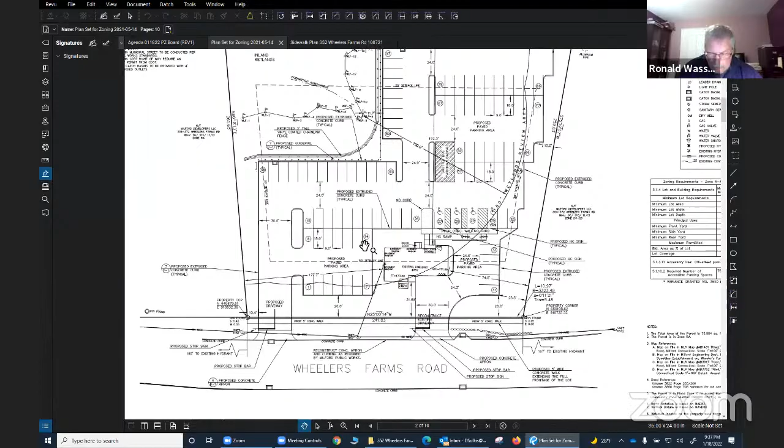Okay, on one side, you have the power lines, right? What's on the other side? I can answer that question. To the north of the property is a landscape buffer that belongs to the office building. Directly beyond that landscape buffer is the driveway that accesses the office building as well as the apartment complex that was recently constructed to the rear of that parcel. So our parcel is literally surrounded by the Milford developers' land, with the exception of our frontage on Wheelers Farms Road.

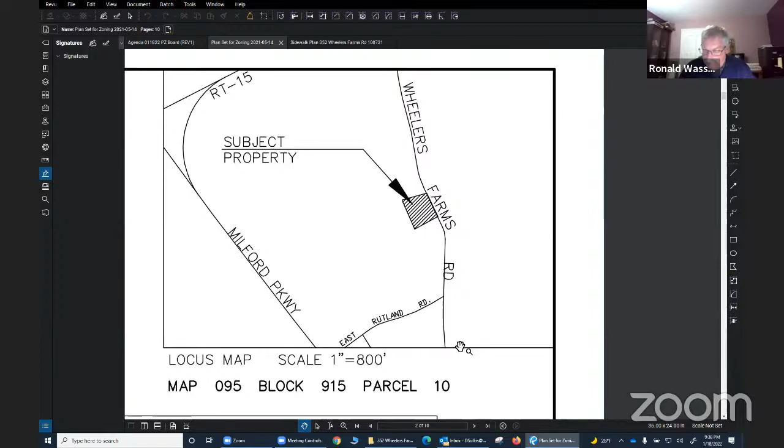Okay, and on the other side, you have the overhead power lines. Yes. And those power lines are on the property of Milford developers, which is the office building and apartment complex. Okay, thank you. Okay, Mr. Cater?

The only thing I just want to say is I agree with everything. The part about the painted crosswalks and possibly crossing signs, I think, would be really critical. That part of the road can have a lot of traffic and be dangerous. And Milford's had some issues with people crossing the road, so I'd like to see that definitely happen. Yeah, that comes under the purview of the traffic division and the police department. So whatever they want us to do, we'll do.

Mr. Sadi? Thank you. I guess I got a statement and a question for Attorney Lynch. In your years of practice, I'm sure you've never had to follow the axe throwing conversation. No. So I've had a few things with Attorney Klein though that involve bars, but not the axe throwing.

So as I understand the plan, you're adding to the parking spots that are going to be used by the congregation. You're not getting rid of the original parking spots that are around the church. Right. So across the street, they have a fairly large parking lot. Now what we're going to do is add 97 more spaces on this parcel to be used in conjunction with what we're calling the sanctuary building.